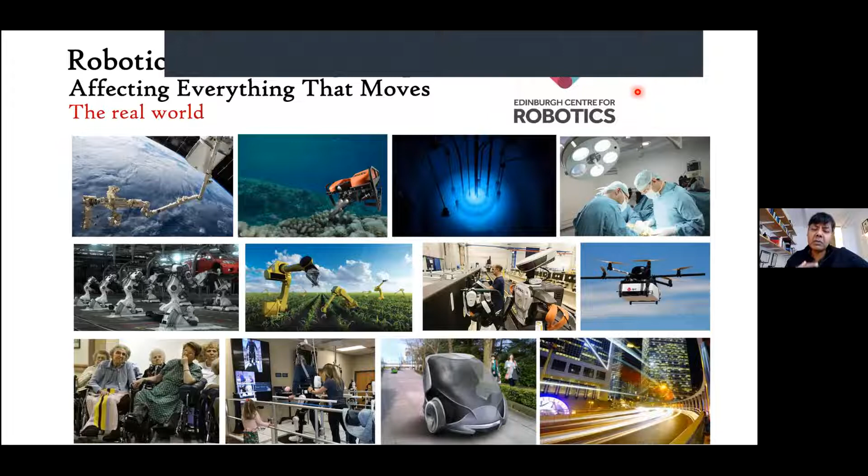So there's a whole range of robotics applications, and I'm not sure how many of you in the audience recognize this kind of figure on the top third, the one I have the pointer on. That actually is inside the core of a nuclear power plant, and one of the challenges involves robots for decommissioning of our nuclear power plants. These are all very exciting challenges for robotics to solve, and I just want to give a perception of where traditionally robotics has been and where we're going with it.

Traditionally, robots have always been programmed by either teleoperation, in other words, getting the robots to mimic a program or a particular sequence of movements and repeat it again and again. So the new research in labs around the world has been pushing this towards getting robots to act more autonomously. In other words, start making decisions on their own, start creating scenarios where humans can be significantly out of the loop and don't have to interact with the robot at a time scale which is on the order of real-time operations.

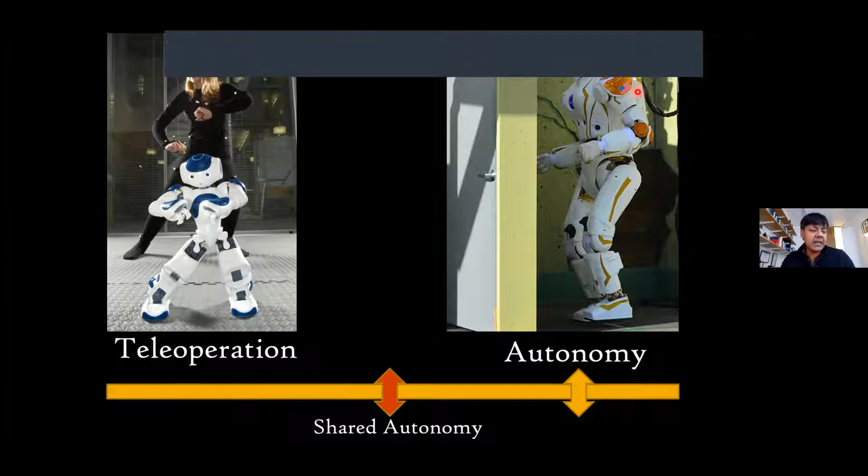But the real challenge, while we wait for autonomous solutions, is somewhere in between, where we can seamlessly move between fully autonomous sort of challenges to fully teleoperated settings. And really, one of the things that we are trying to do is see if we can get robots to autonomously behave in a way that is challenging for different applications.

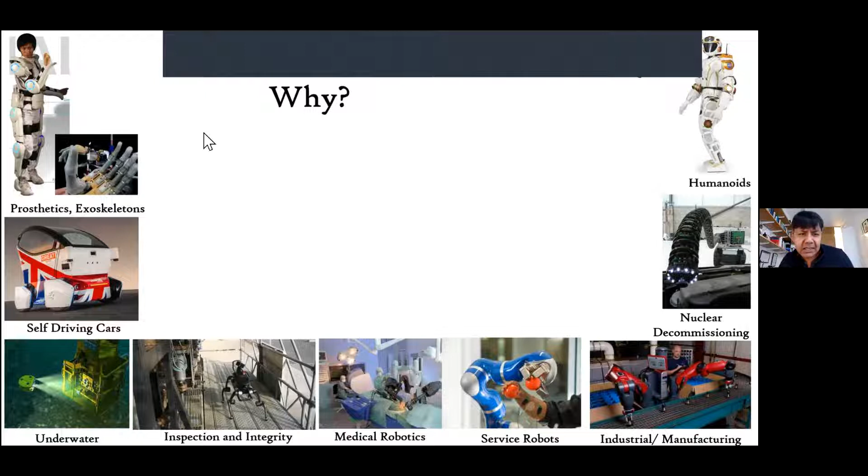Let me try and do one of the... I'm getting a small... Let me try and move this cursor away so that you're getting the full slide. I hope this is a bit of a technological challenge that I'm going to try and fix. Let me see if I can. So I don't think I can move this completely out of the way, but I'll try and adjust it in a way that it is not taking up big parts of the screen.

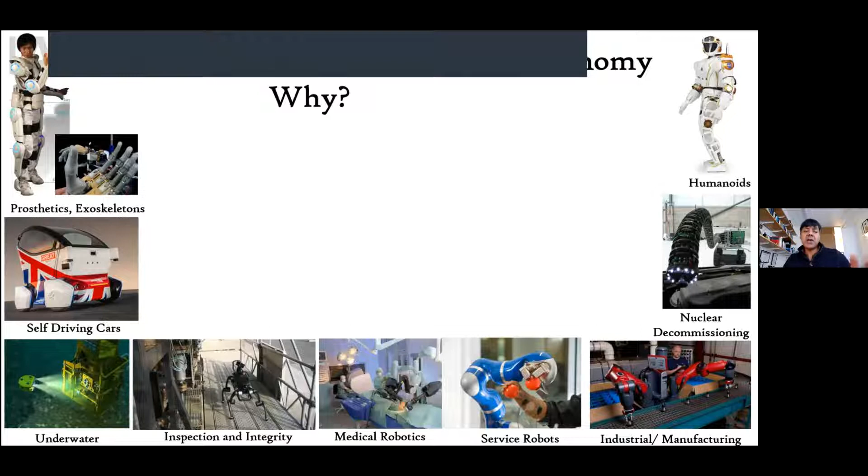Okay, good. So if you think about why we want to deal with collaborative and shared autonomy rather than fully autonomous behaviors, there are some interesting scientific challenges. For example, for fully autonomous behaviors to work, we cannot be dealing with situations where there's close interactions with humans, where there's noise and ambiguity in the sensing, or situations where we've got real world dynamics to deal with. And more often, unknown user intentions are another big challenge.

So these are all challenges that you may face while we are dealing with prosthetics, self-driving cars, underwater robotics, inspection and integrity management in offshore oil and gas platforms, etc.

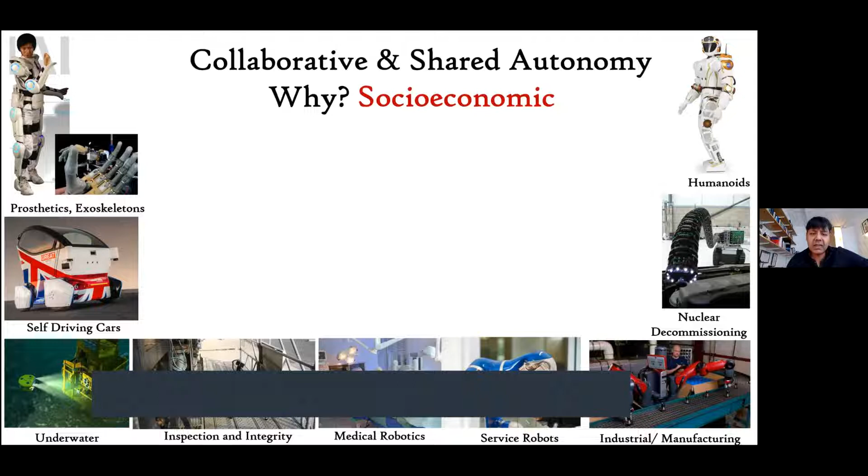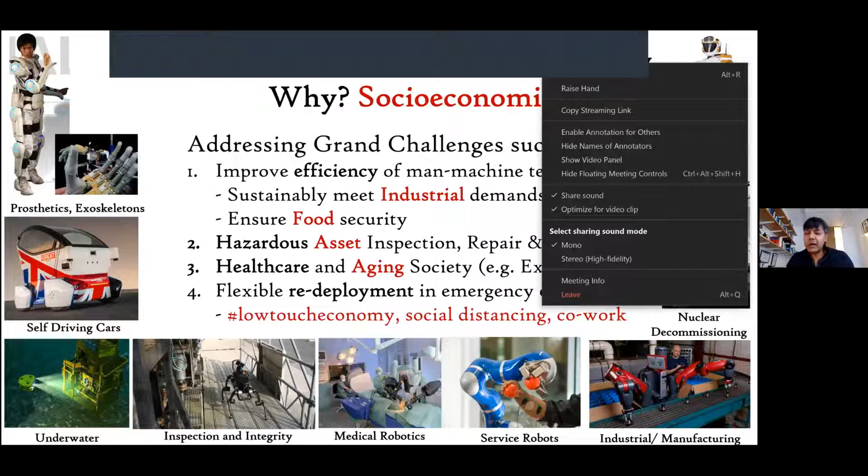In addition to these scientific challenges, there is a socio-economic reason why we want to use robots of these kinds to deal with these things. We are trying to address some of the grand challenges, like improving the efficiency of man-machine teams to meet industrial demands, to ensure food security, but also we are increasingly seeing asset inspection needs in offshore oil and gas platforms, in the nuclear industry for decommissioning. There's also a big challenge in healthcare and aging in our society for exoskeletons, but also flexible redeployment in emergencies like the pandemic, where we're looking for low-touch economy and social distancing for co-work. So the idea is, can we do these things while ensuring we're able to deal with them efficiently?

Let me give you a quick example of how these robots are working, especially how we can use shared autonomy for remote operations. On the screen you'll see a video of a robot screen on the right that a person using the robot sees. On the left will be the actual live image of the robot operating in another room, another environment. This is the console a person sees while the robot is operating autonomously, while the human gives high-level goals or the volition of where to go, where to move, how to avoid obstacles, etc.

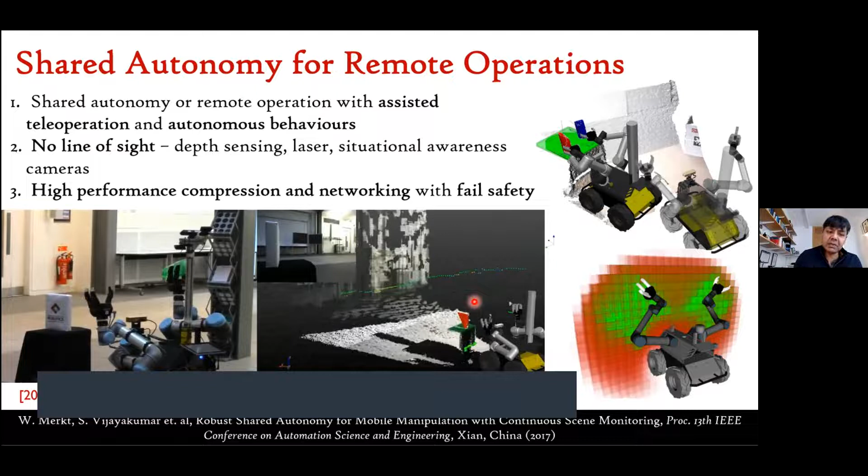The thing to note here is that it is not the human who is deciding which wheels to move, which motors to move, which hands to use, but it's the robot autonomously deciding for itself. The human gives a high-level volition of which object to pick and where to place, and all of the low-level decision-making happens at the level of the individual robots at the site. This is extremely important because often we don't have a direct line of sight, there's an issue with transmission delays, there's an issue with potential networking failure. So autonomous behaviors help you deal with those challenges on the fly.

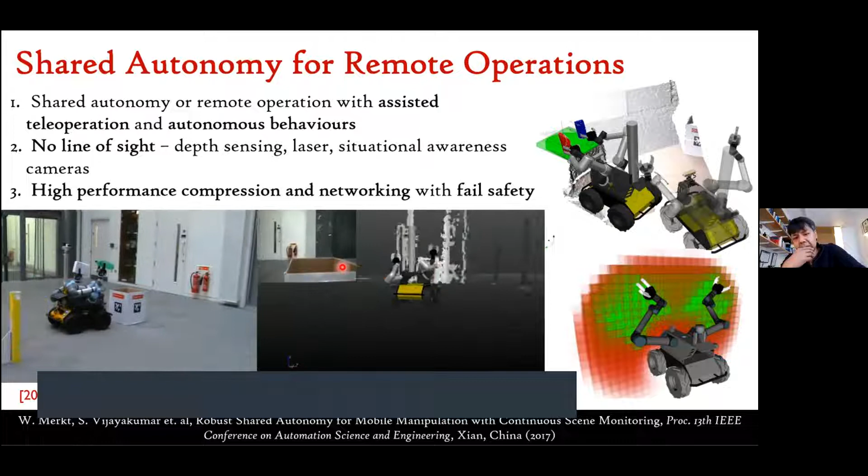We think some of these challenges can be usefully deployed in domains ranging from nuclear and offshore decommissioning, disaster recovery, collaborative manufacturing, remote operations of heavy machinery, etc. These are the kind of portfolios of research projects in our lab that use shared autonomy. One project I want to highlight is something called the Orca Hub, which is offshore robotics for certification of assets, particularly in the offshore oil and gas industry.

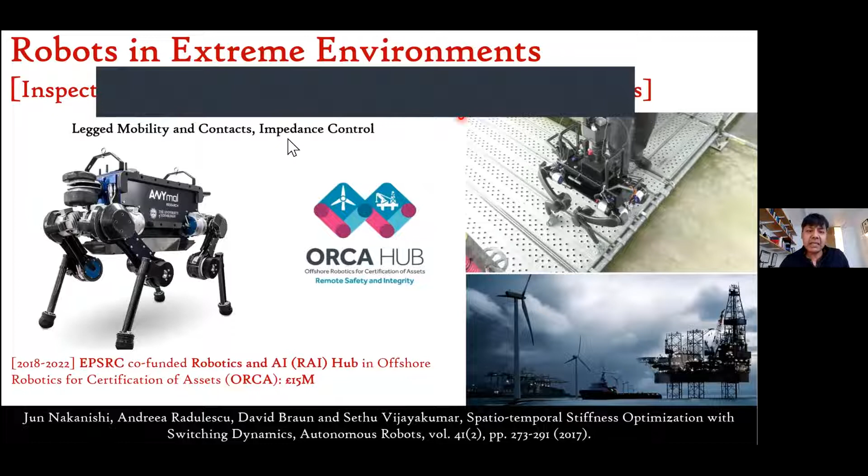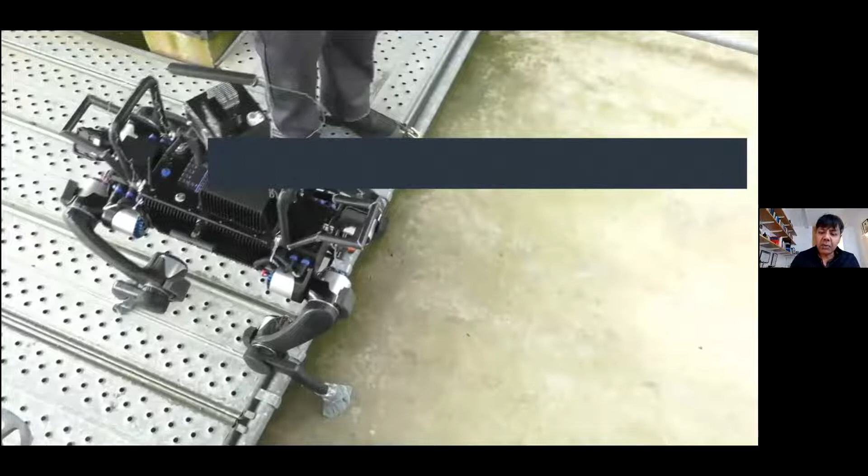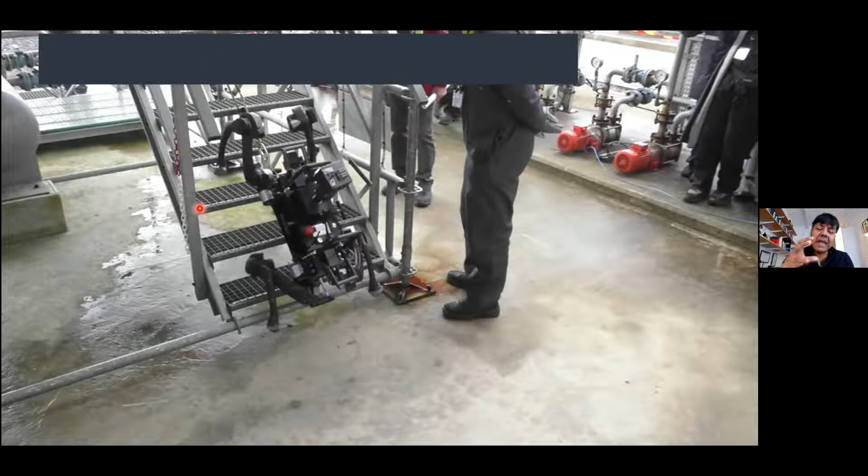Some of the things we've been looking at is how we can use legged robots to do offshore asset inspection. You can probably see a video now of the robot operating in an environment that is very hard for wheels to operate - it's got obstacles, it has to step over obstacles, climb steps. The idea is not just for robots to go and map the environment and sense the world, but to be able to operate equipment, turn valves, push buttons, take sensor readings on the fly while operating in very complex environments like these.

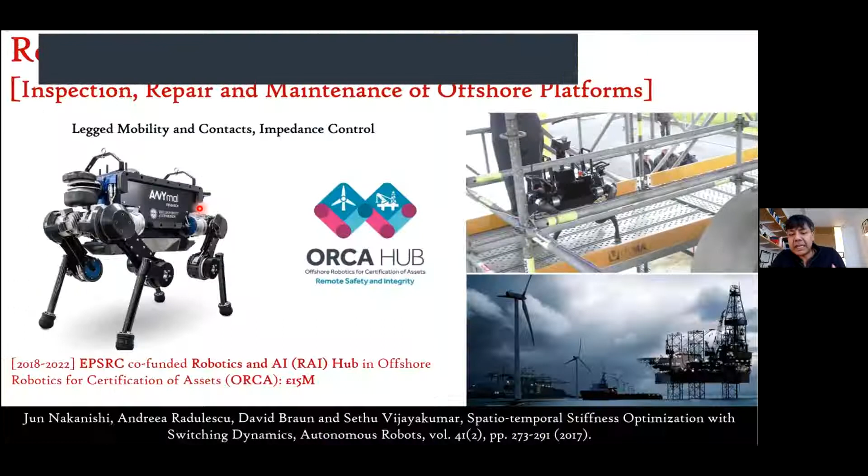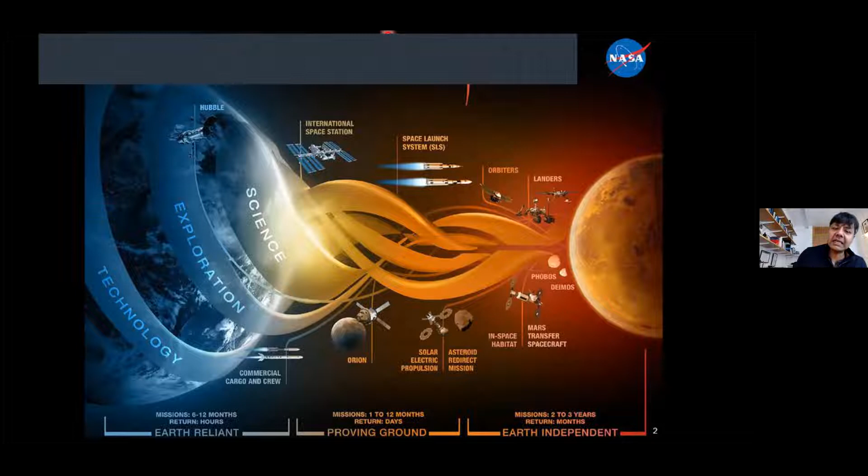The other big challenge we've been looking at, one of our flagship projects, is with NASA, with the Johnson Space Center in Houston, where one of the challenges is can we use robots for not just International Space Station deployment, but on future missions to Mars? Can we use robots as a way of creating assets on the surface of Mars before astronauts arrive, or can we also use these robots as a way of maintaining assets when the astronauts are not on the surface?

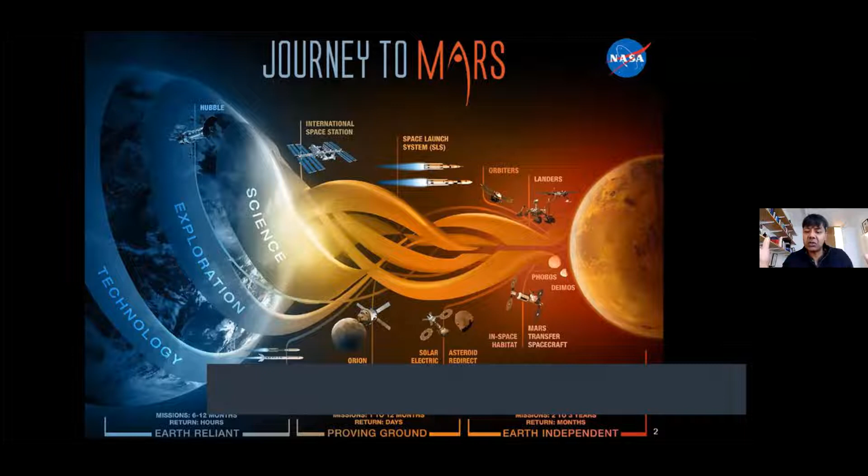So if you think about it, what are the kind of capabilities that we may need for robots like these to operate efficiently? We don't think of space when we talk about extreme environments, but space is an extremely hostile environment where astronauts are doing spacewalks because they have to, not out of choice. So this is where we're trying to build capabilities equivalent to a human being.

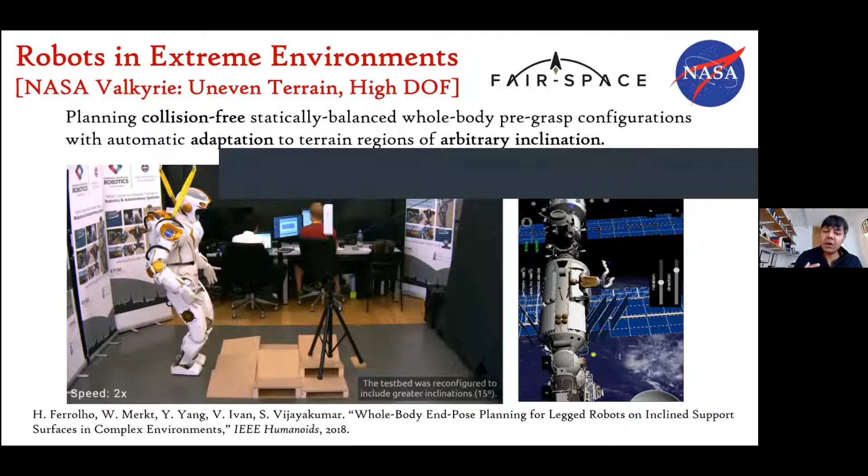Things like walking on uneven terrain. What you see in this video is a humanoid NASA Valkyrie robot in our lab being trained to walk on uneven terrain using onboard sensing. On the right you can see the kind of LiDAR-based sensing that the robot sees, and then it decides for itself where to step, how to step, and how to maintain balance.

One of the challenges is how do we do multiple hierarchies of tasks while the robot is trying to maintain balance? Maintaining balance is a priority, while reaching and grasping for objects is a secondary task that it needs to fulfill. So those are the kind of scientific challenges that we're trying to address and operate with.

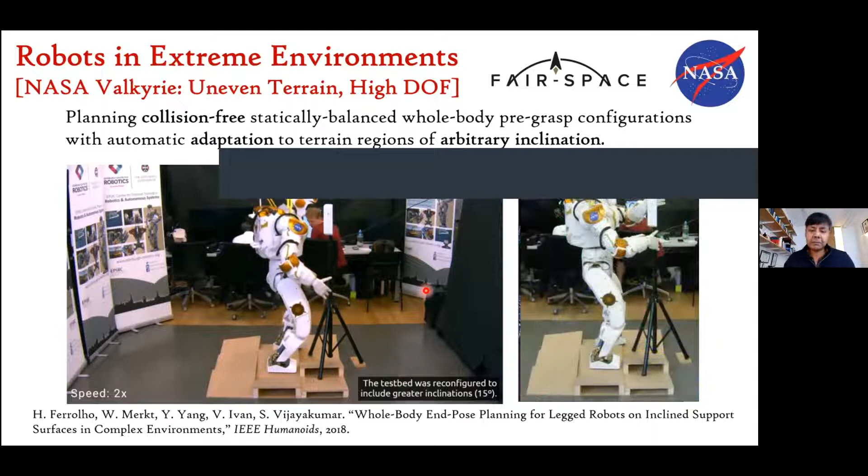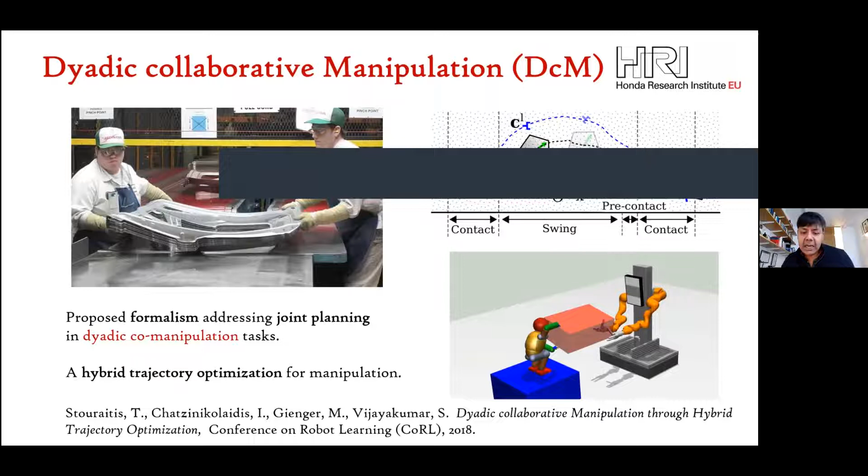It's not just in the space industry, we're also looking at how we can use robots for the manufacturing sector. We have a project with the Honda Research Institute, which is for help robots and humans working together to lift heavy loads, weld, and do accurate positioning.

Some of the works we've been doing in collaboration with Honda involve simulating both a robot and a human and their interaction, and looking at how we can get this on real hardware. As a prototype, how can robots and humans work together to manipulate objects of interest?

This is a very challenging job, because you have to understand the intentions of the humans, but also do optimal behaviors that are time critical. It is very different from a wheeled robot sitting on the ground and moving on an intermittent basis. This is real-time control with very high frequencies.

Where do these things kind of play a big part? They can play a big part in increasing the flexibility of manufacturing settings. Traditionally, if you look at how large aircraft hangars or factories work, you've got large fixed jigs. Now we are already seeing robots and humans working side by side, but not necessarily together.

The future is where we marry the best of both worlds. We marry the precision, accuracy and load capabilities of the robots, while we use the decision-making capabilities of the humans, the contextual decision-making, for doing things like fitting of large parts in collaboration with the robot.

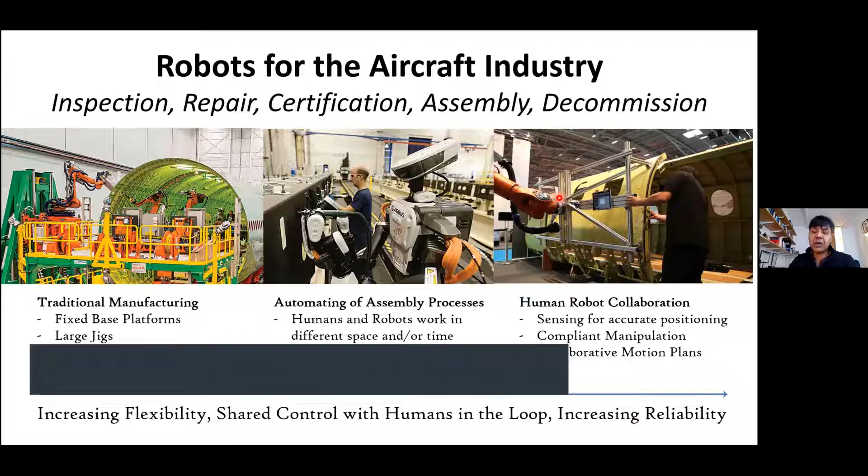Okay, so I want to slightly switch tack and talk about robots in a slightly different domain. Another domain where we've been working with the use of shared autonomy is in the area of healthcare. Here's a collaboration with companies like Touch Bionics and Honda, where we've been looking at upper limb prosthesis, but also lower limb prosthesis, for effectively helping patients who've either lost a limb or have had some sort of injury, either a sports injury, or somebody who's had a stroke and is recovering from post-stroke rehabilitation, for example.

So let me see if I can get this video to you. I'm just trying to see if we can get this tab to move off. It seems to be quite annoying, but I'm not sure there's an easy solution to that. Okay, no worries.

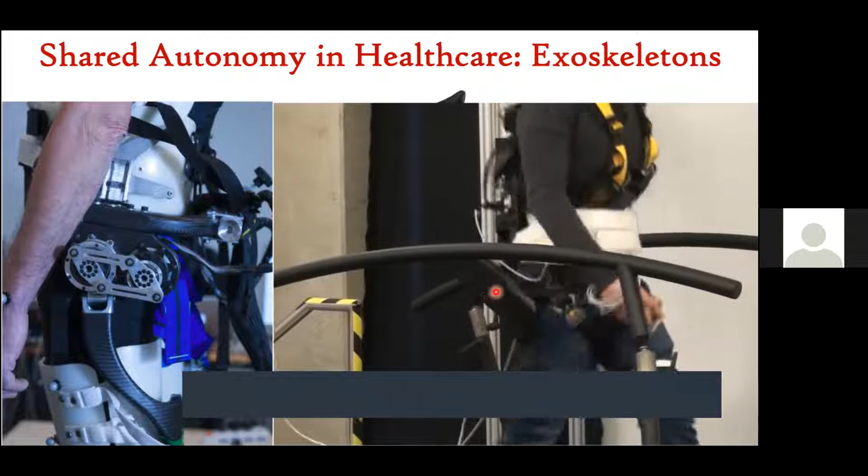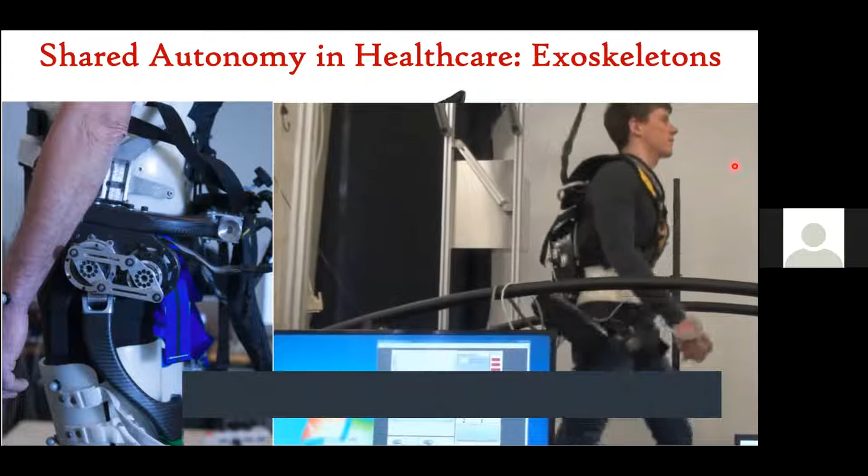One of the things, as you can probably see, the video here on the right is in our lab. We have a prosthetic, a person wearing an exoskeleton, which is applying forces on their legs, and in doing so, you can use it for helping them walk, say, up a slope, so that the person feels as if you're kind of being assisted while walking, or it can be used for rehabilitation settings, as I said before.

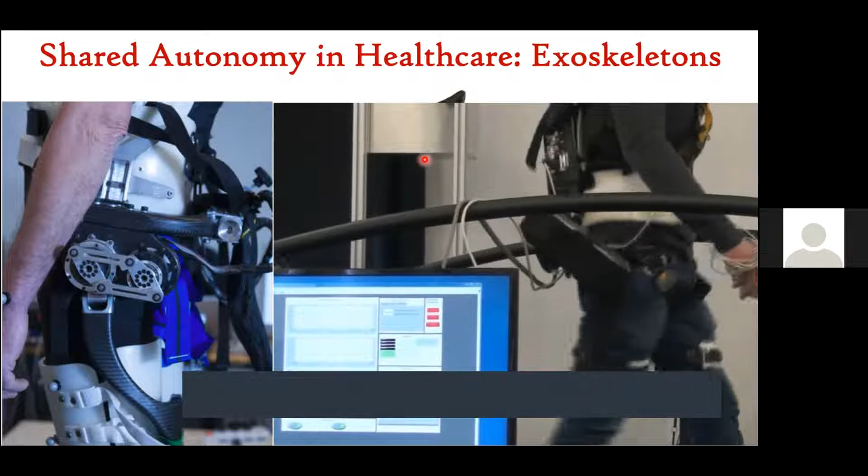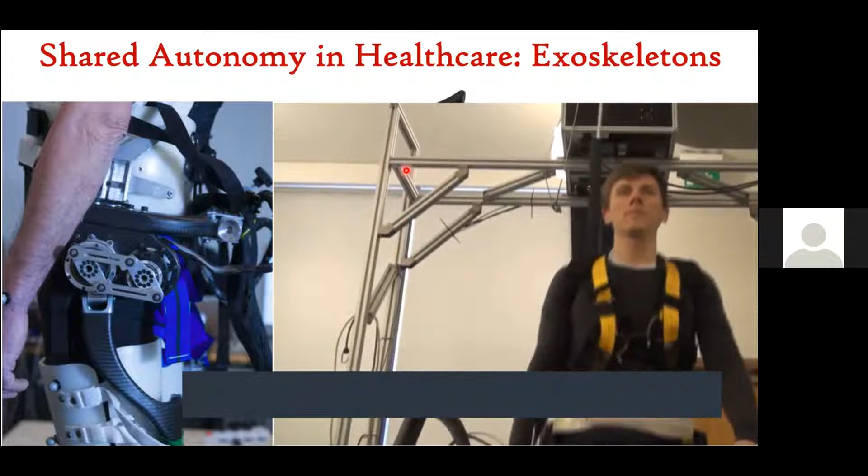The real scientific challenge is how do I coordinate the movement of the humans and the exoskeleton in a way that it is not disruptive, but actually is helping the person in this task? And you will see some part of this live at the end of this talk when we go live to the lab.

Science fiction has always been inspiring. We've always seen movies like Iron Man, where we think about the future of work, sitting in the comfort of your home and controlling multiple robots and devices in remote locations. Although this was science fiction, this notion of using robots effectively is becoming increasingly more realistic, increasingly real-time and real life.

And there are some scientific challenges in addressing that, and I'm going to try and point out a few open scientific challenges, underlying open scientific challenges that I want to point out.

So, for example, we do need to worry about safety in these settings, especially when humans are involved. We need to ensure that in hardware you've got compliant actuation, in software we've got real-time adaptation, to be able to ensure that when robots and humans interact, they are safe. For that, we've been building lots of variable impedance actuation mechanisms, so robots that work efficiently on the fly with adaptation, with soft compliance in the loop.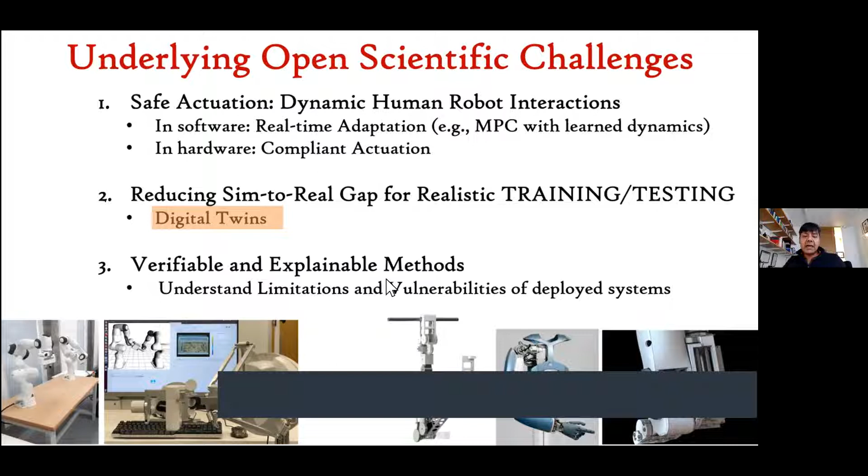This second challenge is what we call reducing the sim-to-real gap. For example, getting digital twins to work, where we can get robots to be as close as possible to realistic simulations, so that we can do a lot of learning without really having to run the robot, while the real world physical simulations match this.

And lastly, I think one of the crucial elements of robotics is trying to build systems that are verifiable and explainable. This boils down to the fact that if something goes wrong, can we understand why something has gone wrong? What is the reason behind the failures, and be able to fix it? This becomes even more poignant when we are using adaptive and learning systems.

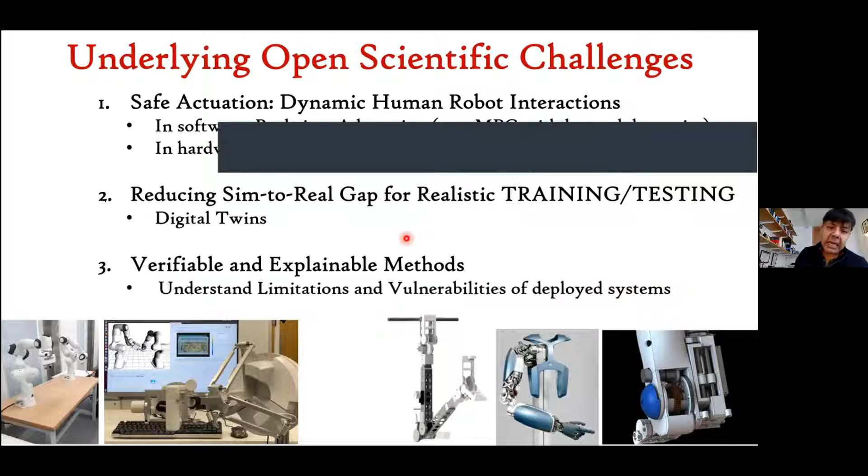And what we've done is, we haven't fully addressed all the socio-ethical questions in this talk. I don't have the time to cover all of these things, but I do want to reassure you that in doing the science that we do, we have been asking some very poignant questions about moral, ethical, and decisions that need to be made while developing this kind of technology.

How do we ensure responsibility and explainability? How do we transfer control between a robot and a human, and how do we do that seamlessly? And how do we deal with issues that arise out of learning systems that constantly adapt?

And in order to do that, we've been looking at doing this through a couple of our initiatives, both at the University of Edinburgh, and as part of, I'm a co-director of the Alan Turing Institute, which specifically looks at some of these moral and ethical decision-making in technology issues.

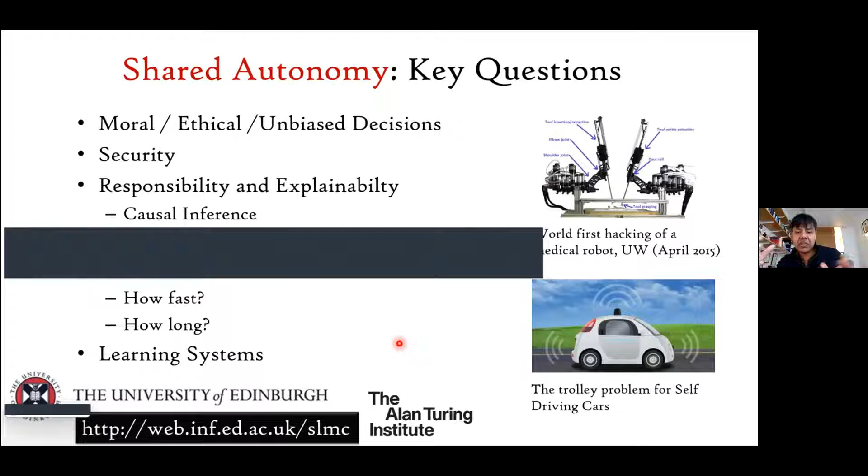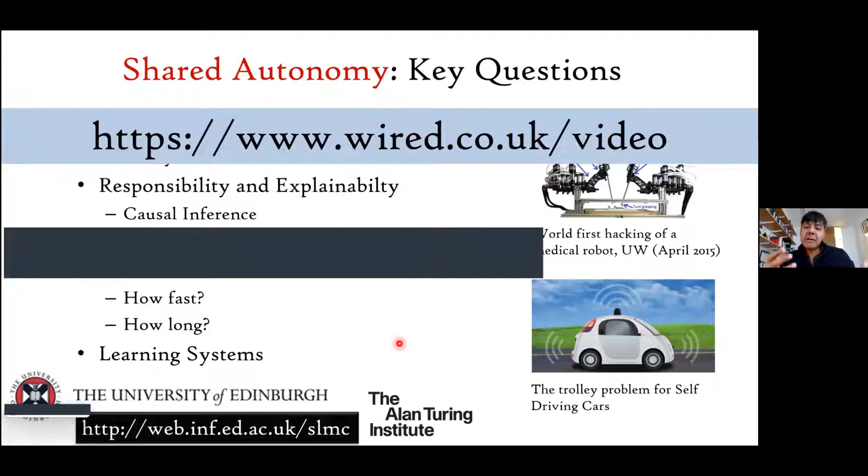And if you're interested, if you now go to the Wired UK website, there are a couple of videos, four subparts of a documentary that has been shot by Wired UK, which exactly addresses this problem of technological advances and the biases and the moral and ethical questions that we have to ask while we're developing this technology.

So the last thing I want to briefly address is, in trying to do all of these things, the way we've been doing this is by setting up a large center. It's called the Edinburgh Centre for Robotics. And this is not just about science, this is not just about technology. It's about taking novel ideas and scientific ideas from innovation in labs to market through high TRL level, high technology readiness level ladders, through world-class assets and skills, and working with government and lawmakers to make this happen. So do check out the Centre for Robotics.

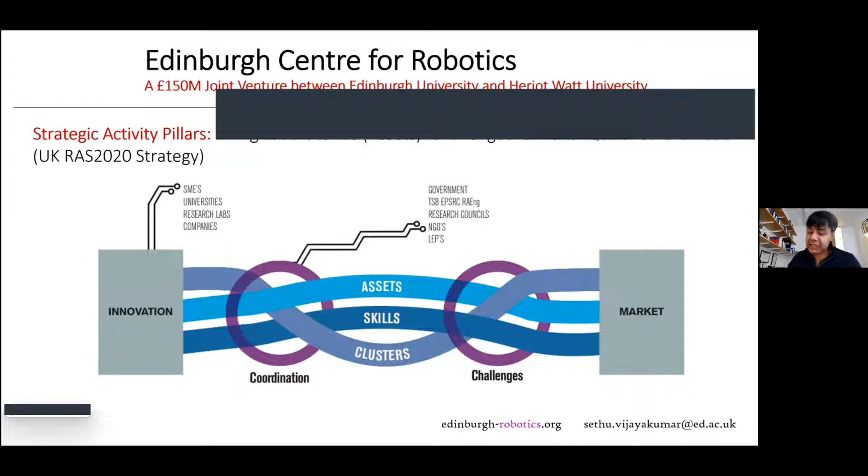So what I'm going to do next is to stop by quoting one of my favorite authors, Arthur C. Clarke. And this quote is very poignant in the field of robotics: we tend to overestimate technology in the short term, meaning we are always kind of overhyping the impact of robotics. And that can be a big problem if you're not careful about the limitations, or understanding the limitations of this technology.

But at the same time, often we underestimate technology in the long term. So indeed, robotics is going to play a huge part in how we are going to live our lives in the next decade or so. And if we don't understand and study the impact of this technology, both in terms of jobs and skill sets etc., then it is going to be challenging to address that at a later stage.

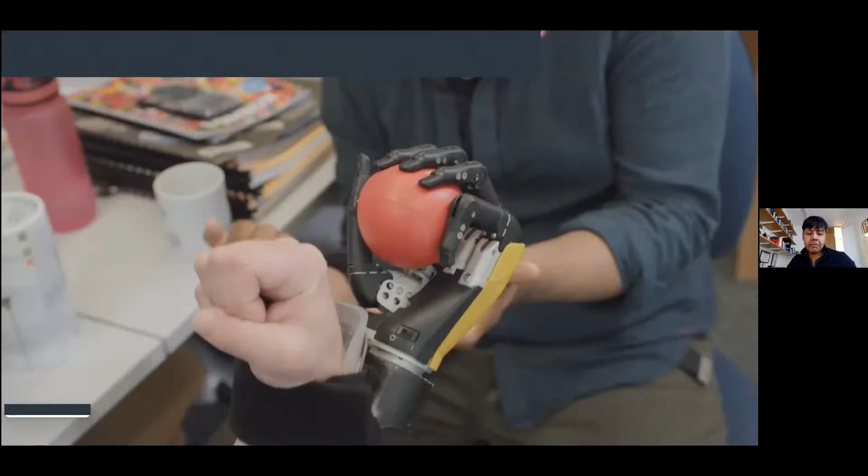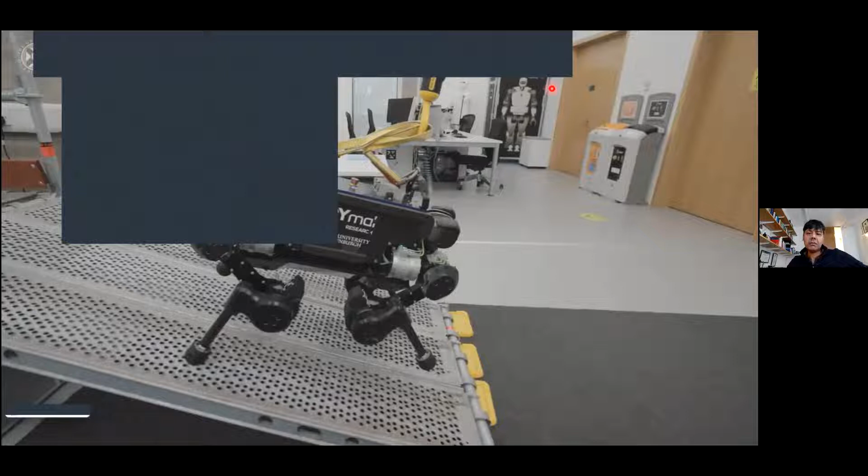Welcome to the Statistical Machine Learning and Motor Control group at the University of Edinburgh. Here we do exciting, world-leading research on robotics, machine learning, and data-driven techniques using artificial intelligence to make robots a lot more versatile and adaptive to real-world situations.

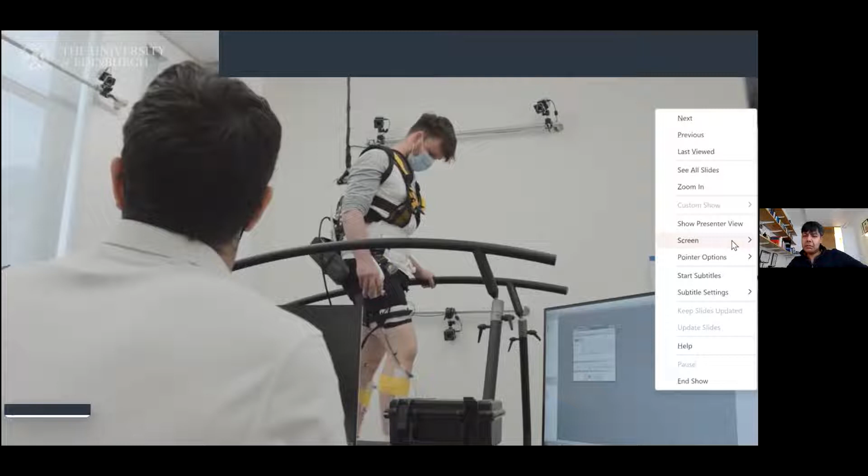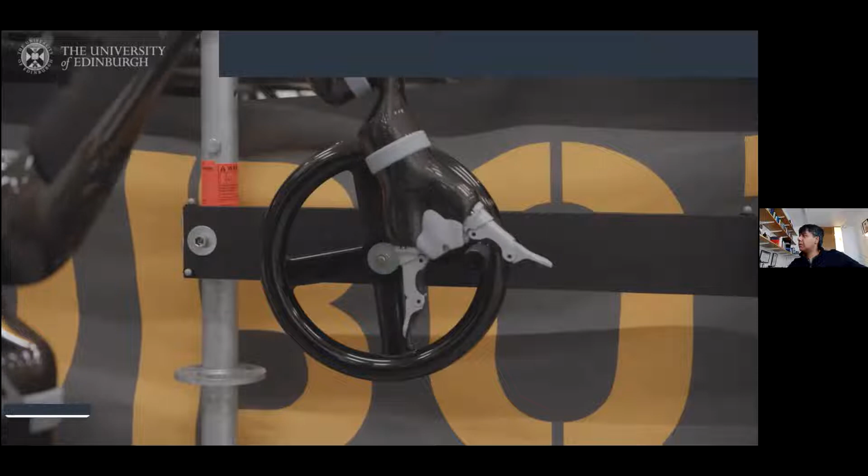We do work across domains, applying core problems in robotics and machine learning to oil and gas, transport, healthcare, as well as challenges of exploration in outer space. We want our robots to be autonomously deployed in industrial plants to perform inspection tasks, accomplishing tasks that humans can't do or that are dangerous for them. Our main business is to educate the next generation of outstanding postgraduate students and conduct cutting-edge research.

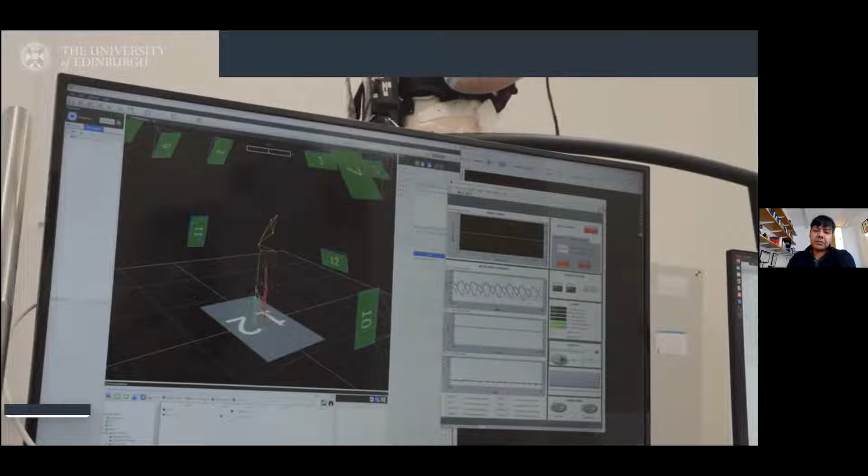My research is focused on designing exoskeleton controllers that can assist people completing tasks such as walking. To achieve this, we build complex neuromuscular models of human subjects and combine this with detailed motion data collected in our gait lab. We hope that by combining robotic assistance with electrical stimulation, physical therapists can have a tool to personalize intervention and improve the outcomes of physical therapy.

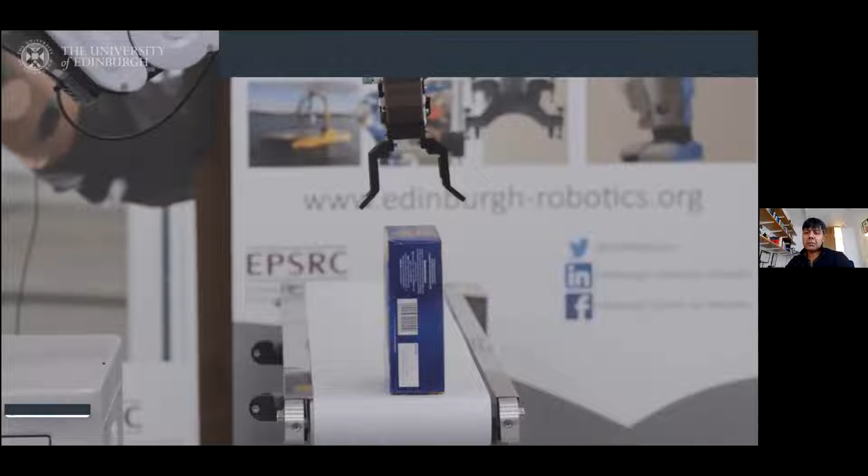My research is about robot localization in changing environments, when the robot's view is nearly occluded by large moving objects. We want the robot to learn which objects are of interest without requiring a human to provide information about the shape or visual appearance of those objects.

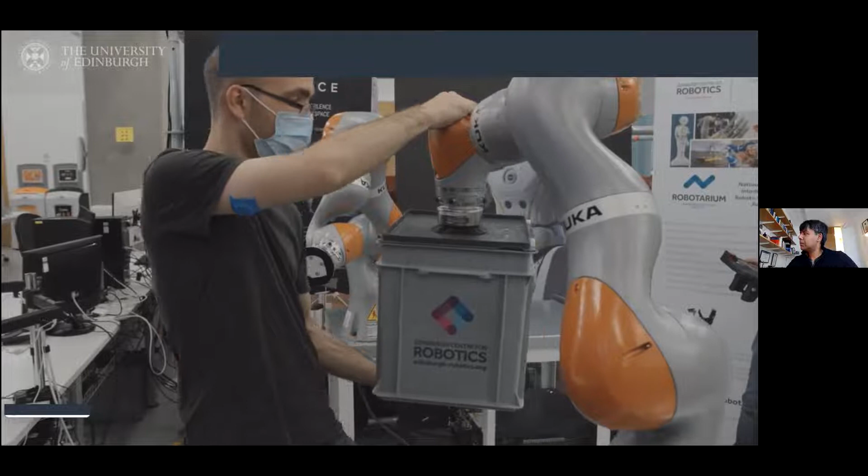In order to enable robots to move while in contact, for example when wiping a table or pushing a heavy object, my research focuses on how to plan or learn those types of physical contact interactions. We are developing mathematical models to enable a robot to capture heavy and moving objects with two arms, while at the same time handling impact.

My research involves both humans and robots, where first we enable robots to predict humans' intentions and actions, and we also generate safe robot actions in order to help the humans reach their goal.

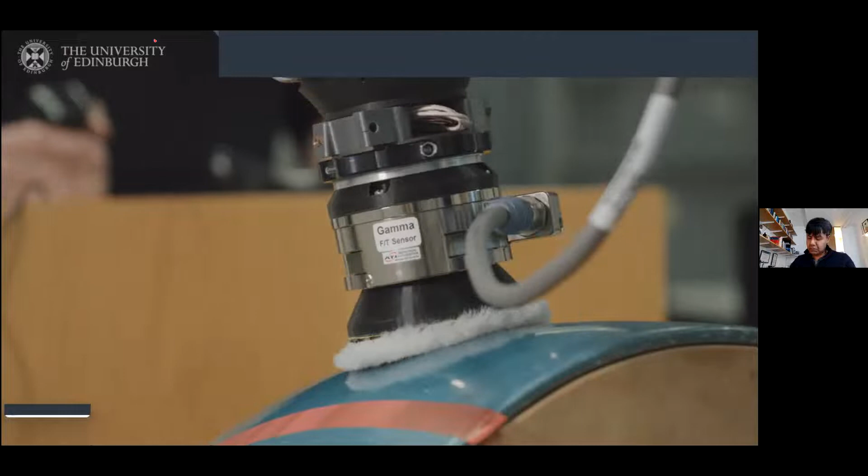In construction, robots are often operated by humans in dangerous environments, needing expensive training. To reduce the operator burden, I'm working on shared autonomy, which combines human input and autonomous methods so the human can best utilize their expertise.

I'm really interested in human-robot collaboration, so how we can enable robots to perform a common task effectively with humans, such as pouring wine into a human's glass. But humans are really difficult to predict, so I'm interested in how we can better make those predictions.

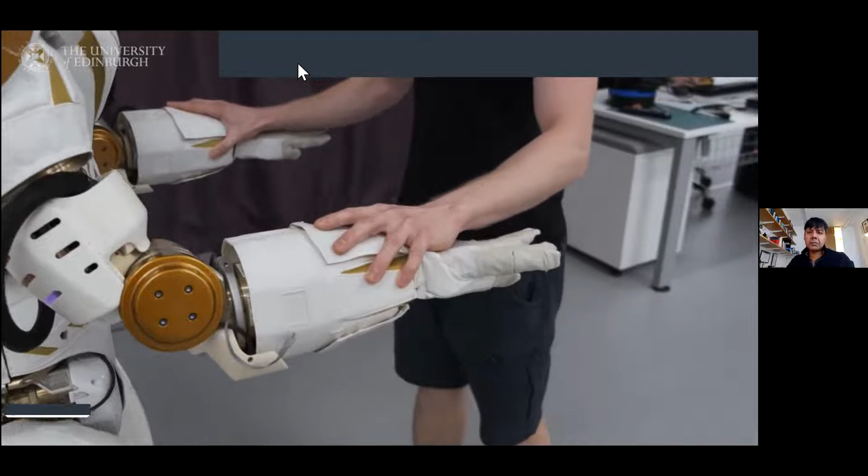I'm working on the development of robots that can be easily taught to manipulate objects and potentially collaborate with people or assist people in need, just by giving a demonstration of the task.

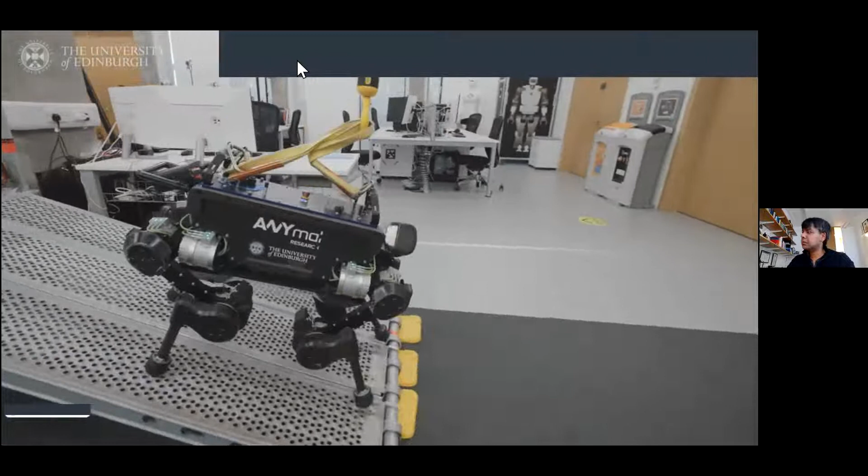I'm working on legged robots to make them traverse challenging terrains. The idea we propose is to start with a capable controller that already works on the robot, then extend and add capabilities to make the robot cross challenging terrains.

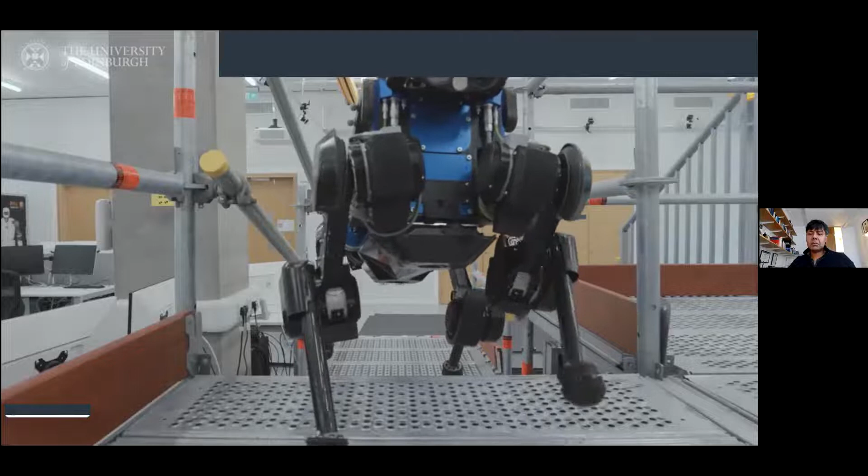I'm working as a software engineer in a field robotics lab, and also doing research about quadruped robots. I'm working on how those robots with 4 legs should plan their footsteps, considering the torque limits on their legs.

When robots have to perform manipulation and walk simultaneously, they face a lot of uncertainty. One way we can increase the robustness of the system is by taking into account the capabilities of the robot, so its motors and also the contact stability.

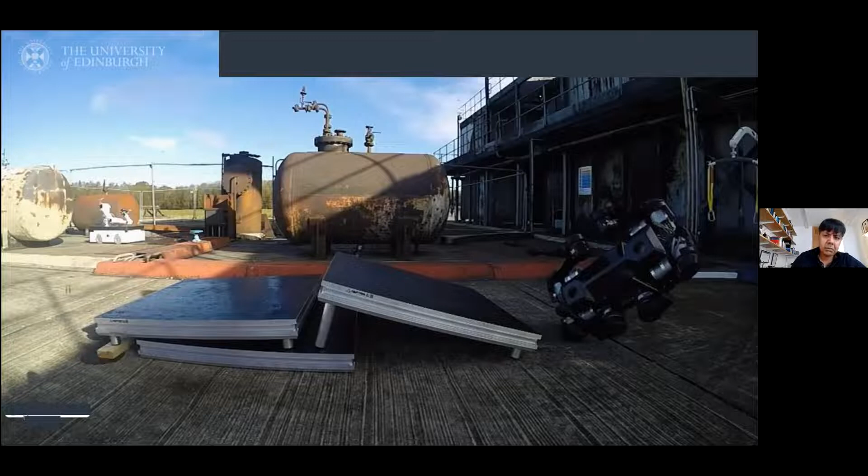There are many conditions that we cannot predict. For instance, when navigating on an offshore platform, we might encounter a floor that is wet. A way of dealing with this kind of uncertainty is by replanning new motions quickly.

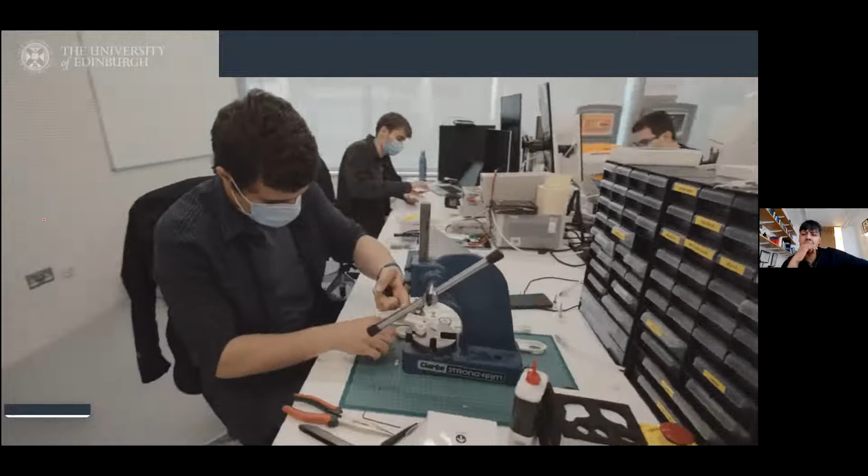I'm working on building better robots for specific tasks. So a robot that walks might need to be built a little differently than one that jumps.

I'm working to create algorithms that modify the designs based on the tasks, and I'm looking at making those more efficient and physically realistic.

My work focuses on motion planning, especially when it comes to environment changes that are in and out, or the objects that the robot is trying to pick up and move are moving. This is especially useful when working with robots that need to be safe around people and other robots.

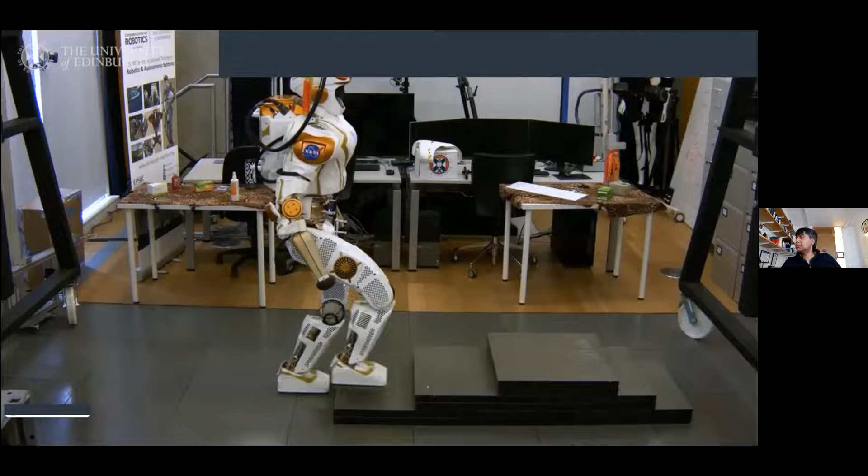The environment may have many different inclined slopes, and this gives rise to a lot of different options of when to place the foot and where to place the foot.

Robots in the real world have to operate in environments where obstacles around them are moving, whether that's in hospitals where we have people moving around, or in a factory where you have other robots that you might need to avoid. My research interests are in developing algorithms and motion planning software that will allow us to move robots in ways that avoid those obstacles.

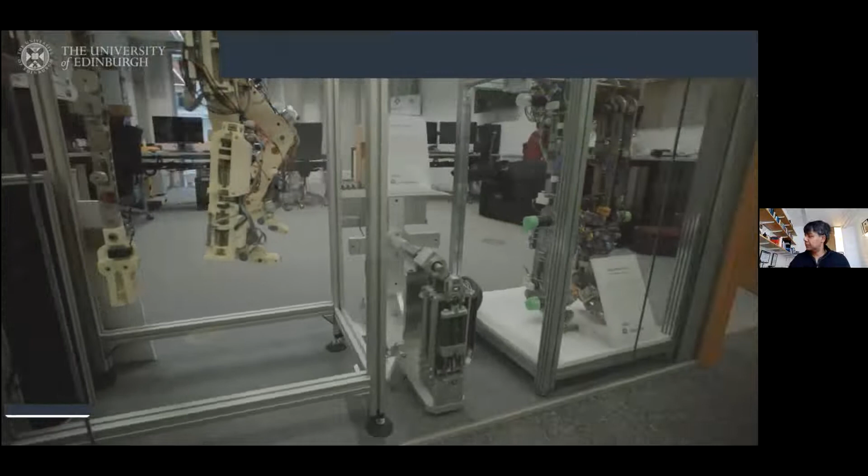I've particularly enjoyed working on the large-scale projects within the group, helping with the project management side with the Alan Turing Institute, the ISCF hubs, and also the EU Horizon 2020 projects. So if you've liked some of the research you've seen in the video and would like to work on some of these exciting platforms and projects, please get in touch with us, and we'd love to have you as part of our team.

Okay, excellent. So I hope you've managed to see the video, and got an idea of the breadth of the applications of robotics that the lab works on and also the community works on, and perhaps it's given you some ideas or interesting questions about things we need to worry about and talk about as part of building new kinds of robots, new ideas where robotics can be applied.

So what I'm going to do now is stop sharing my screen, and I'm going to ask one of my postdocs in the lab to start sharing his screen, so that we can go live to the lab, where I will introduce briefly some of the demos, especially of the humanoids and of the exoskeleton stuff. We may be experiencing some technical issues with getting the camera going.

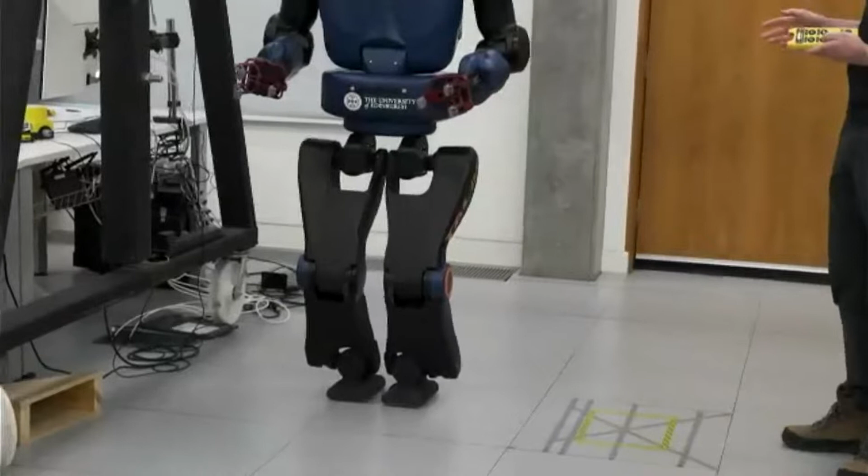So a lot of the work that we do comes down to autonomy, or punctuated autonomy. This is the kind of interaction where you let the robot decide a lot about what it's doing and how it's going to do it. And in doing this, we have learned a lot about how to control and how to design the motion for it.

So we use a lot of ways to model the robot using mathematical equations. We use a lot of kinematics and dynamics and Newton's laws of dynamics to model what the robot is doing. And then we write software that allows us to plan and generate this motion, and also correct for this in real time. By doing this, we have learned a lot about how humans move.

So the next thing that we do with this is look at how we can transfer this onto other robots that we can wear, where this control is actually shared closely with a human. For example, an exoskeleton that can help us rehabilitate. So I'm going to hand over to one of my colleagues, Daniel.

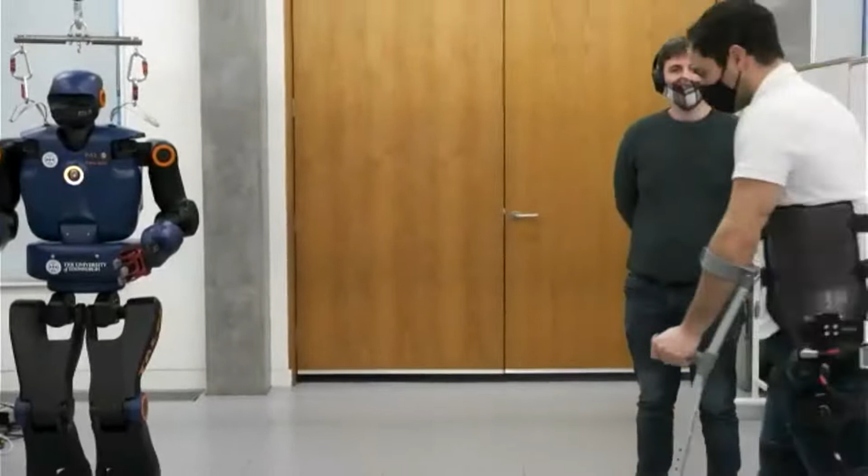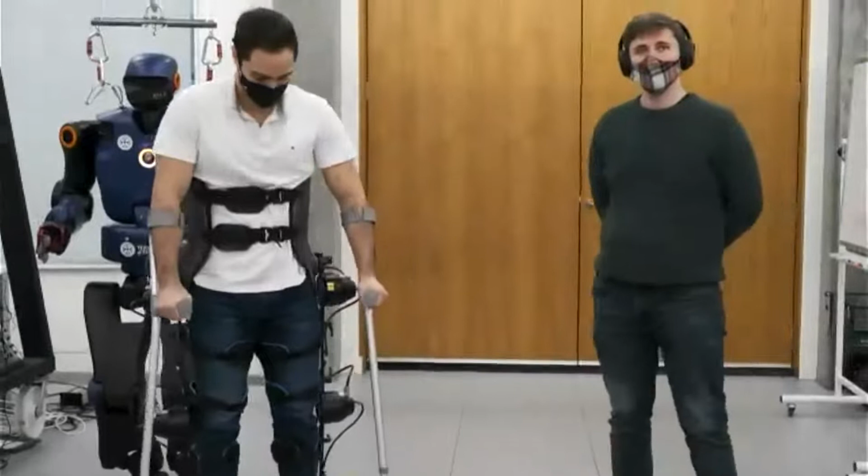So yeah, while Vlad's doing that, just a few things to add. I think people might ask, why the humanoid form? Why don't we put wheels, and why two legs? Why not have four legs or things? And the idea is, by challenging ourselves to do very complex problems like maintaining balance in real time, we are trying to push the boundaries of what control systems and sensing can really hit.

And the exact same solutions can be transferred to, for example, the autonomous driving domain, where we need to react very quickly. If the motors need to react very quickly to a sensor detecting a person stepping in front of an autonomous driving car, these problems are quite related.

Over to you, Daniel. So yes, now what Daniel is going to explain — Daniel's a postdoc with us — is the exoskeleton, the hip, knee, and ankle exoskeleton that Andreas, one of our PhD students, is wearing. Over to you, Daniel. Thanks, Sethu.

Yeah, so as Sethu was saying, one of the things that we're interested in the lab is how we can use robots, but also exoskeletons, to assist humans in assisted living environments. So exoskeletons, like this one that you can see here, are robotic devices that are worn externally to the body, used to apply forces onto humans to assist them while they're completing motions.

So typically exoskeletons will have a number of motors, like these that you can see here on this exoskeleton. These are responsible for generating forces and torques. And those forces and torques are then transmitted from the robot to the human body via some attachment mechanisms, in this case, these straps that you can see here.

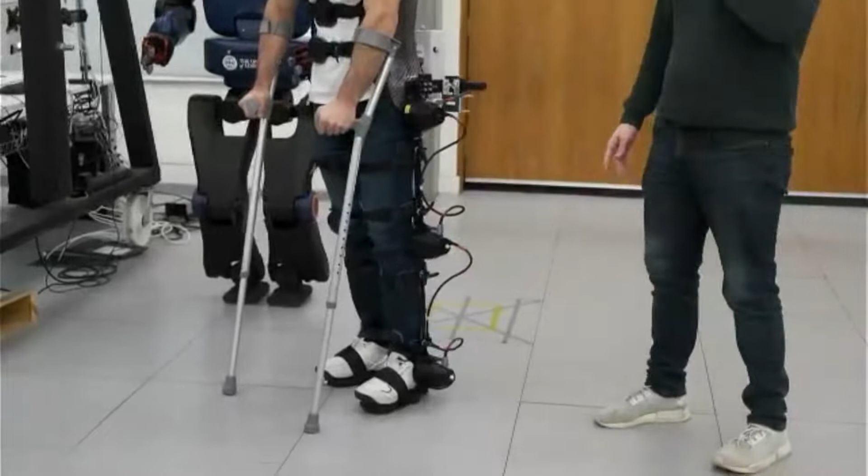As Sethu was saying, this exoskeleton in particular has 6 motors, 3 on each side, assisting the hip, knee, and ankle joint. So it's capable of assisting the full spectrum of lower body locomotion simultaneously. And maybe, Daniel, you might want to add the amount of torque these things are capable of generating.

The amount of torque varies depending on the kind of exoskeleton you're looking at. This one, which is quite a powerful exoskeleton, can go up to a maximum torque of around 100 Newton meters. Typical torque should be 30 to 50 Newton meters. These types of exoskeletons, which have the full range of lower body motion, can be used for very intensive tasks, like assisting paraplegic patients who might be paralyzed from the waist down.

Another key aspect of exoskeleton systems is the sensing capabilities they have. Typically, these include encoders embedded in each joint. In our case, we've got joint position and joint torque encoders in these joints, which allow us to get real-time information on the torques and positions of the joints as Andreas is walking here. This exoskeleton also has pressure sensors on the soles of the feet, so as Andreas takes steps, we can detect when he's making contact with the ground.

One of the big challenges for us as exoskeleton researchers is how we can use information from exoskeleton sensors and other available sensors to inform the correct timing and magnitude of assistance, so that we effectively assist people as they're walking or completing other motions. The aim of our research with these devices is to eventually design controllers which can safely assist people who need it, such as the elderly or people with mobility issues. We're also looking at how we can reduce the physical strain on healthcare professionals like nurses and physiotherapists, to reduce the chance of injury in the workplace.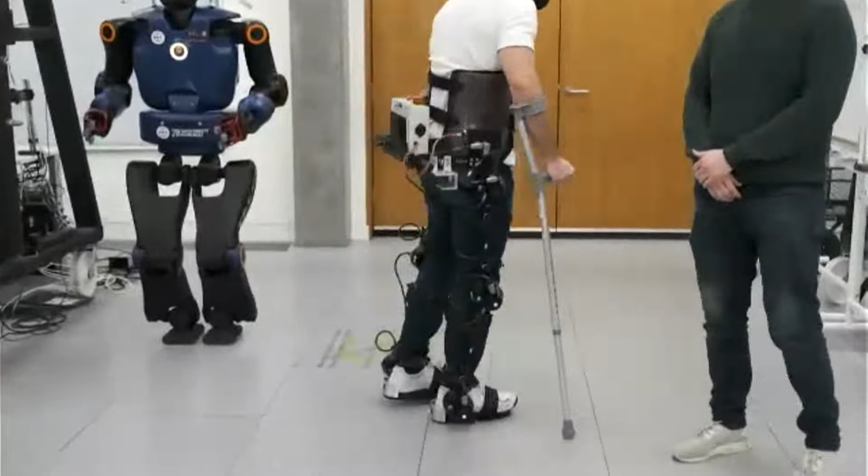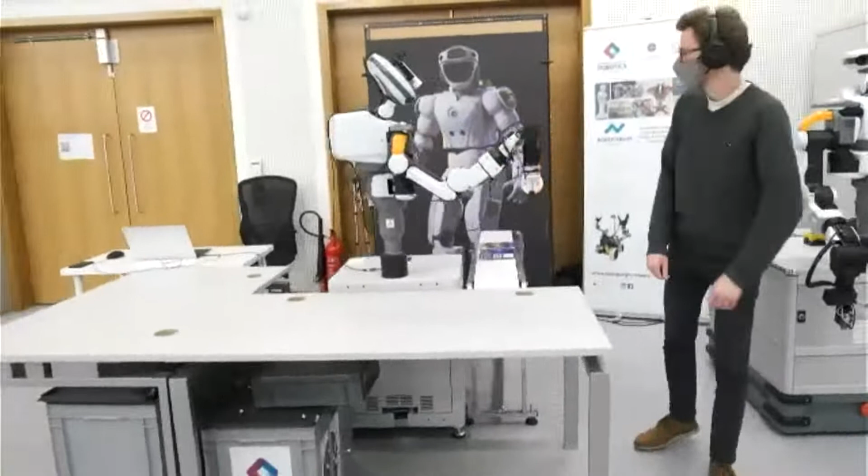Thank you, Daniel, that was very useful. We're going to move to the next station where we'll look at some robots for reconfigurable factories. But one more thing to add: exoskeletons, we think of them as assisting humans or people who are injured, sick, or recovering from stroke. But in theory, they can also be used for factory workers who are perfectly healthy but doing very heavy repetitive tasks, so you want to take the load off their backs so they don't face long-term injury.

Some of the work we've been doing, especially in collaboration with Honda, is on using these kinds of exoskeletons as a way of encouraging ergonomic behaviors in factory workers, but also assisting people who use heavy tools.

Excellent. Now let's go to the third station, where Christian's going to tell us a little bit about this upper body dual arm humanoid used for the reconfigurable factories of the future. Over to you, Christian. Hi.

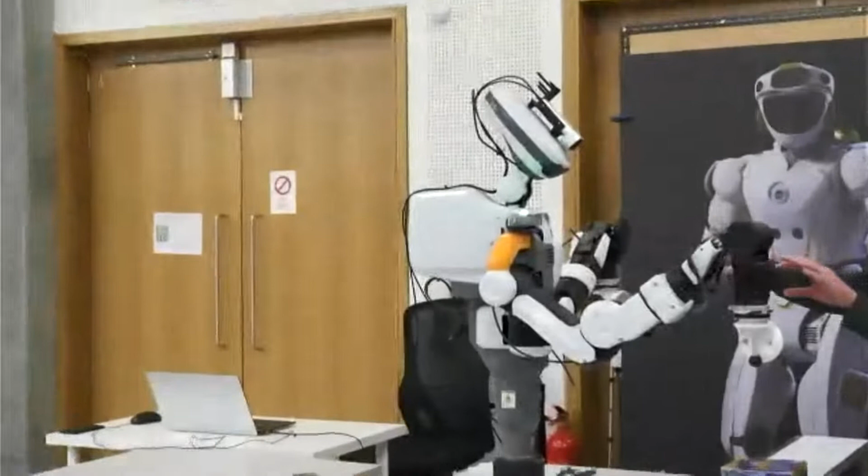So this is the Nextage robot, and you see that the upper part is the humanoid base. This robot has two 6 degrees of freedom arms, plus an additional degree of freedom for rotating the torso. This is used to interact with the environment, so we can pick up objects and place them somewhere else. At the end of the arms we have two end effectors, and you see those are flat end effectors. When we want to pick up objects, it's done basically with the palm, and you can pick up smaller and larger objects using this.

This robot is usually used in a factory, and we're using it in a project we call the Smart Reconfigurable Factory. The idea is that you can build up a factory line, for example with this conveyor belt and tables, without needing to predefine where the conveyor belt or tables are. Also, when you interact with objects like this box, you don't have to predefine how the object looks. So you can move the robot into a new environment, place the conveyor belt and table, use new objects, and you don't have to specify all this, and can continue with your typical pick and place task in the factory.

I'm now going to demonstrate how this pick and place task works, and I'll talk a bit through the experiment.

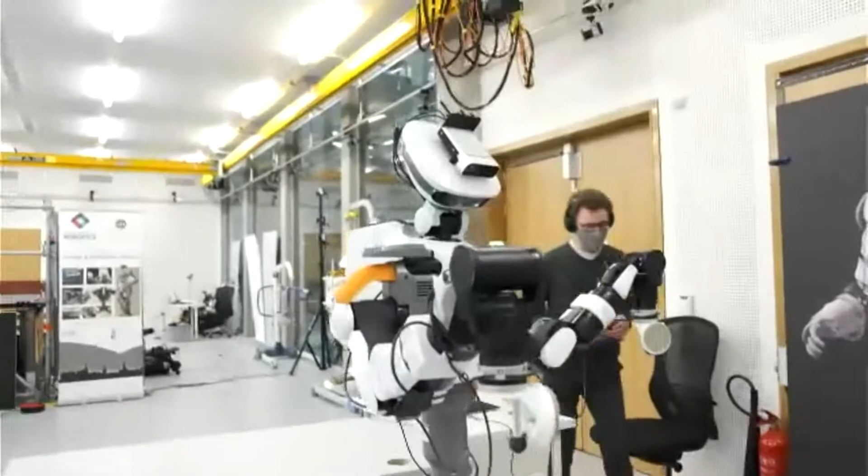Oh sorry, I forgot to mention, it has a color and depth camera on the head with which it can observe the environment. By rotating its torso, it can map the rest of the environment.

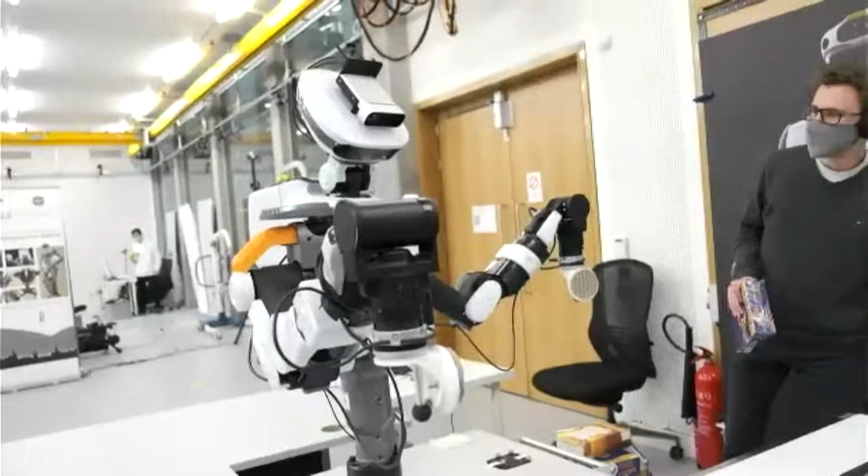With this camera, it is observing this conveyor belt, and if I turn on this conveyor belt now, you see that the conveyor belt is moving and the robot is observing it.

Now if I start the experiment, you see that the robot is adjusting to observe the conveyor belt. It has never seen this object before. Now if I place this object on the conveyor belt, the camera is detecting this motion and tracking this object.

Once I stop the object, the robot will know that this is the object it should grasp, and I will just acknowledge this. And now it will go with the hands towards the object to grasp it from the conveyor belt and place it on the table.

In this smart reconfigure factory, the idea is that at the end of the table, we can have a human that interacts with the robot, and the robot would slide the object towards the human. So in order to safely interact with the human, so that these workspaces don't collide, but we can still enable a collaboration between humans and robots.

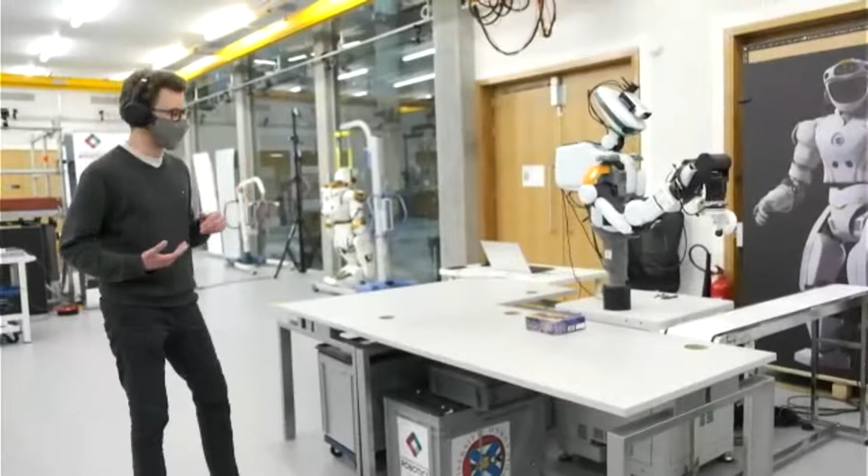In future, sorry, no that's okay. Yeah, I was going to just bridge this.

Thanks, Christian. I was going to say that one of the scientific challenges in these kinds of settings is we can move the robot around, the belt around, or the table around, and still, because we are doing live sensing and live modeling, we can get the robot to react to these. This is in contrast to factories where you have to very precisely calibrate everything ahead of time and get everything fixed to a particular location. The moment the calibration is off, the pick and place goes wrong.

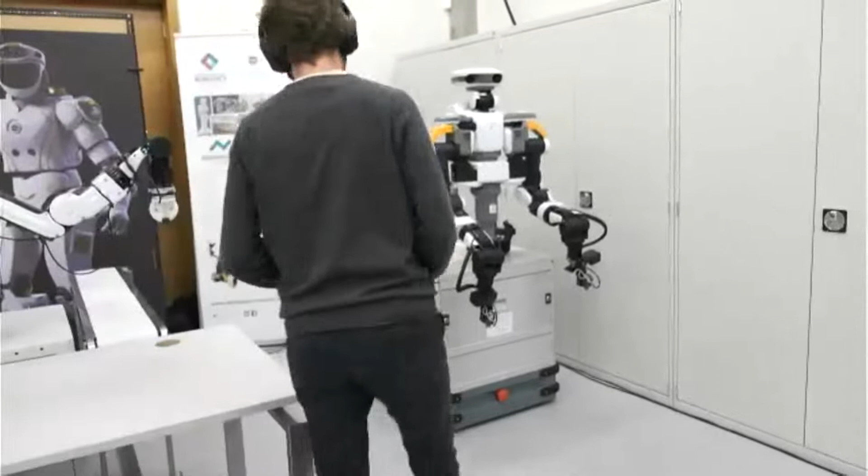In future, we would like to extend this to a mobile platform where the robot is not static, but can move around freely in the factory, for example to autonomously pick and place objects somewhere.

On top of detecting these objects, the robot needs to be able to localize itself. So it not only needs to know what the objects are and where they are, but also where the robot is itself. In addition, it needs to avoid obstacles when moving between places for pick and place tasks.

Thanks, Christian. I think we need to move on in the interest of time. So the last station we're going to get to is the quadruped. It's exciting technology where we're going from wheels to robots that can walk on 4 legs and manipulate.

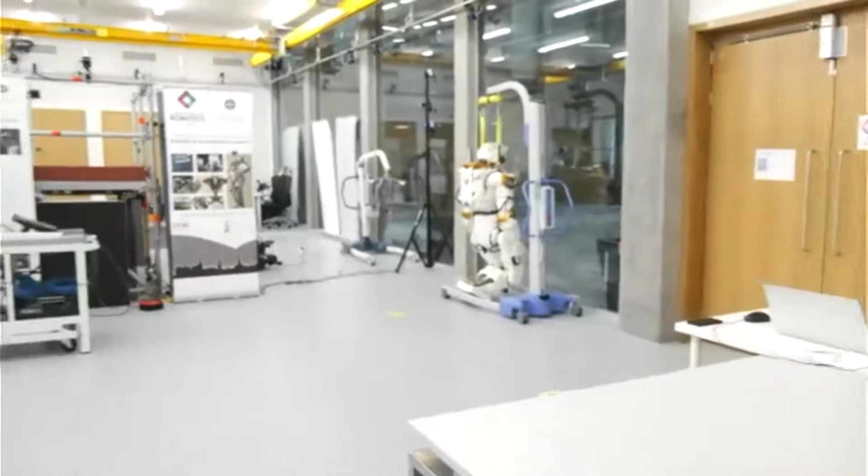In the interest of time, we're just going to show you a very short demo of the robot actually reaching for a valve and operating it. So let's see if that is working. Let me...

Hello. So hi, Eric. Yes, go ahead.

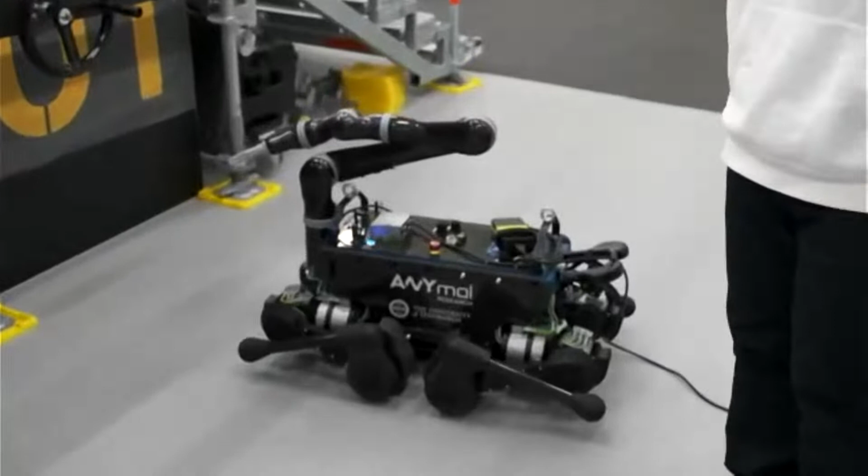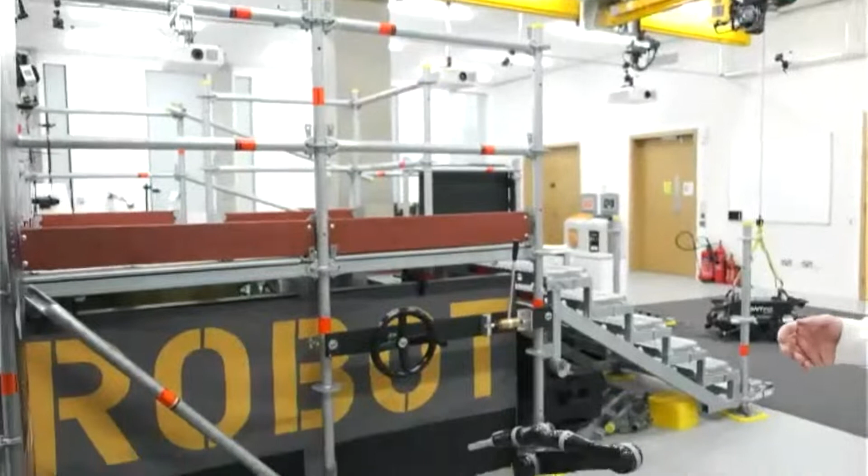Hi. So here in this part of the lab, we have a quadruped robot that has been mounted with a Kinova arm, and we also have a scaffolding mock-up like an oil rig. This mock-up is useful for us to test things that are challenges for the robot in the real world. It's simulating, for example, an offshore platform in the sea where the robot has to operate.

Usually these kinds of quadruped robots have 4 legs, as you can see here, and they can walk around. Recently they are being used for inspection and maintenance operations where they have sensors to walk around these offshore platforms and see whether something has broken and needs intervention.

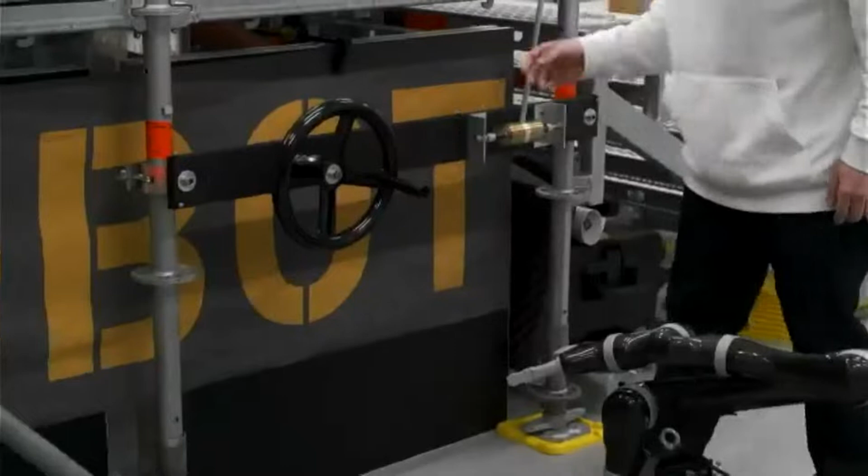However, we are going an extra step further and putting an arm on top of it. So the robot can not only walk around and inspect its environment with its sensors, it also has the capability of manipulating that environment. We have a couple of props here, like a hand wheel which the robot can turn, a lever which the robot can pull, and a bunch of other tasks that mimic situations the robot would need to face in real life.

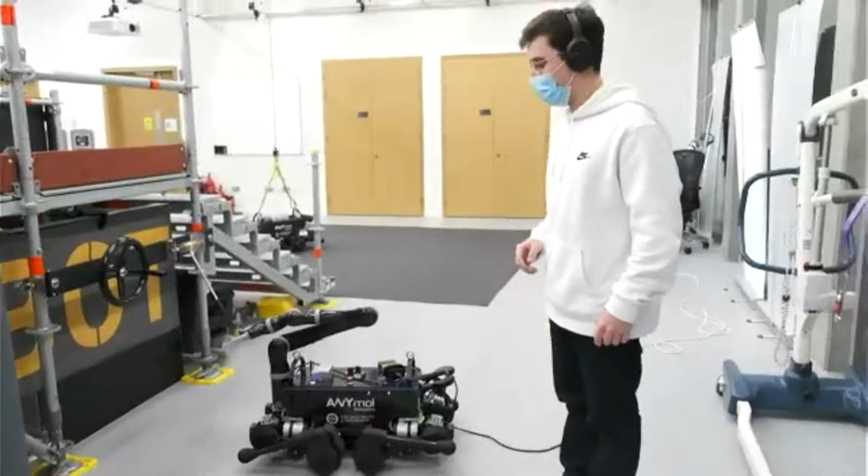Unfortunately, we are having some technical issues, so we had prepared the demo, but it's not working. I apologize for that. Okay, no problem, Eric. Are we not doing the arm either, right?

No, unfortunately, we just had a technical issue and it's not working. But I'm happy to answer any questions. Yeah, no problem.